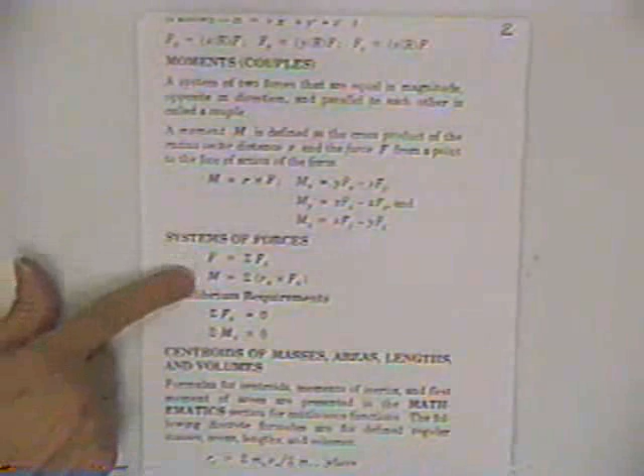There is a section called statics. It is only 2 pages long. There are many more problems that involve statics on the quiz than that, but this is the type of material we're going to cover. You'll notice I give you information on forces, resultant of forces, resolving forces from their components or taking components of the force, moments or couples, sets of forces or systems of forces. Once we get forces behind us, including forces and moments, we'll be doing centroids of various items.

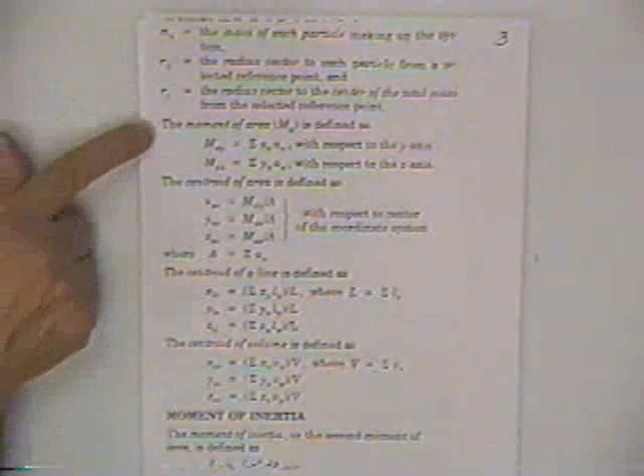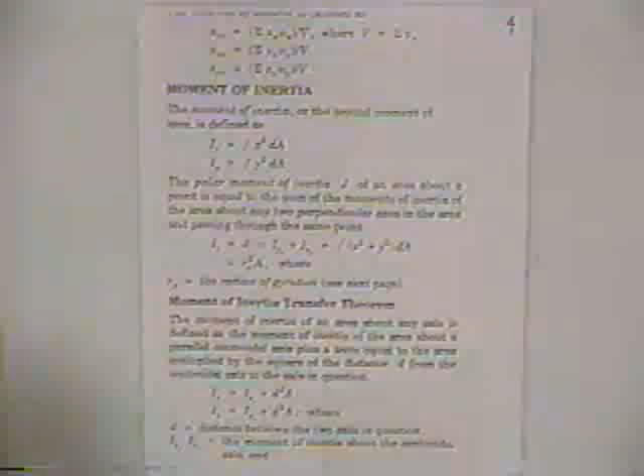There's about another half a page of information or derivations or controlling equations for how to find centroids. Information on moments of inertia. You see some of this duplicated because when I blew it up it got a little larger. And moment of inertia transfer theorem. Again, part of your moment of inertia equation.

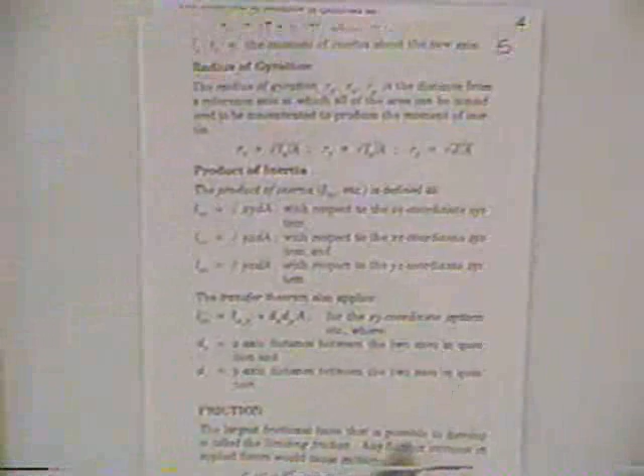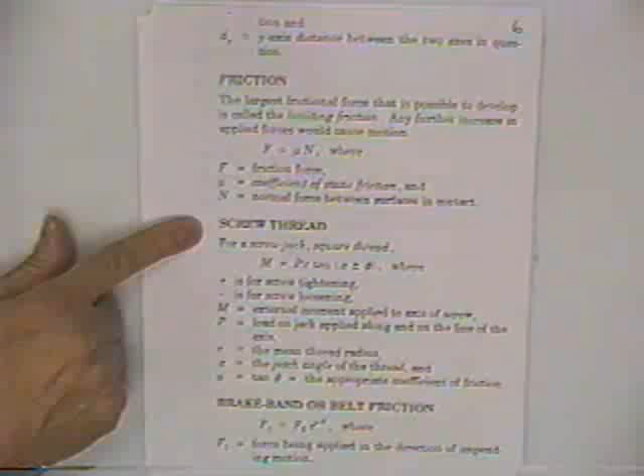They hint that they may indeed ask you information on how to find a radius of gyration used in column buckling work, how to find a product moment of inertia, back in some more traditional statics, friction. They got some things a little arcane, I would think, but if it's in this book, someone convinced these people that that was an important enough item to put in there, so we will cover it.

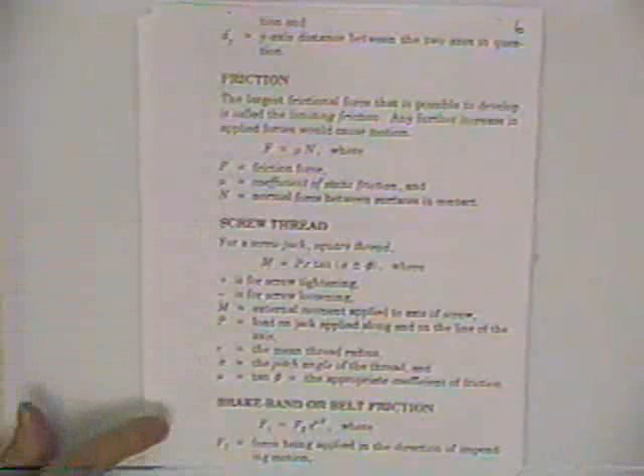Square thread screw jacks, brake band or belt friction, statically determinate trusses, plane trusses by method of joints and by method of sections, and then concurrent forces in 2 and 3 dimensions.

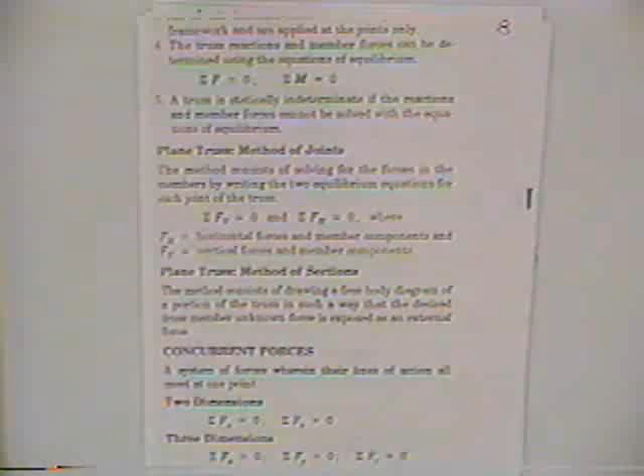Now, one of the interesting things you find in here that really seems to be left out is frames, and I believe the reason they left frames out of this information is because it is nothing but statics. They've already pretty well asked you to be able to put pieces of bars and stuff like that in equilibrium, and so I can pretty well assure you there's very likely to be a frame problem on there, so we'll cover frames also.

We'll start from the beginning for anybody who's really forgotten all this stuff. If you already pretty well know this, you could, if you've got a tape on your own, you could advance it forward. First, let's take some forces, typical forces.

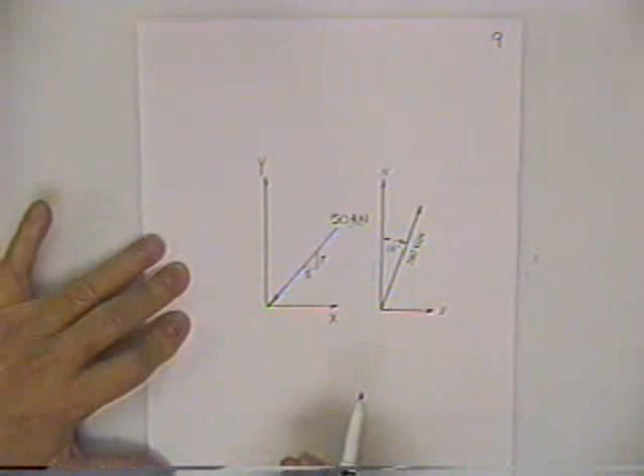The exam is going almost entirely now to metric units, so you'll probably see most of the problems in meters and newtons and that type of units. You should go ahead and get familiar with them. If you're unfamiliar with them, they're confusing for a while, but the more you work with them, they just become another way to buy some Rice Krispies by the newton instead of by the pound, so it probably won't matter much.

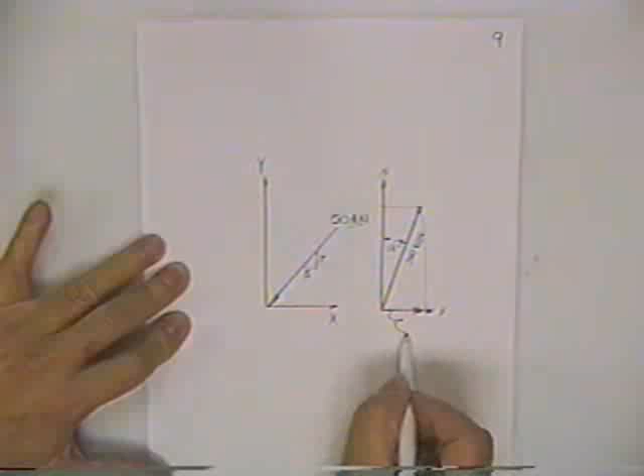There's two ways they would give you a force. Many times you will need to determine the component of these forces on a set of axes. They could give you the force and give you some angle, perhaps with respect to the vertical axis, perhaps with respect to the horizontal axis. You can draw a box around this force. The projection on the x-axis could be found by simply multiplying the original force, 260,000 pounds, and then you multiply that times the cosine of the included angle between the force and the axis that you have been asked to find that component. So since we've got 90 degrees in a right angle, we're talking about 72 degrees.

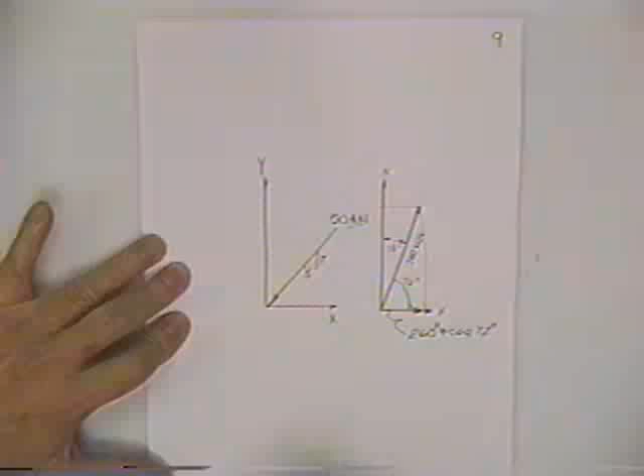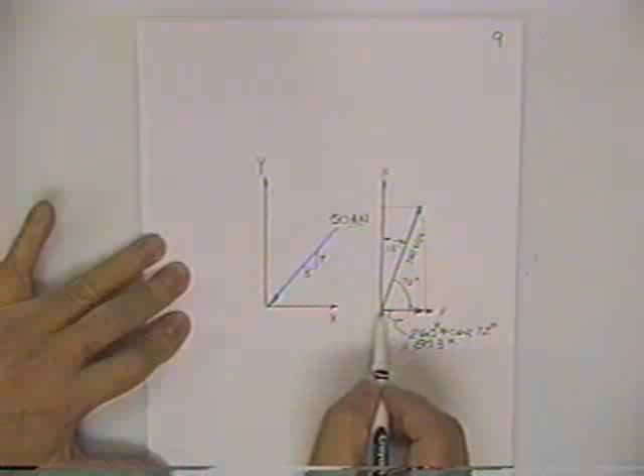260 kips times the cosine of 72 degrees gives 80.3. You should be able to tell if this is reasonably accurate, because if this line is about 260 inches long, then this side of the triangle is about 80 inches long. So 260 kips, about 80 kips, is probably correct.

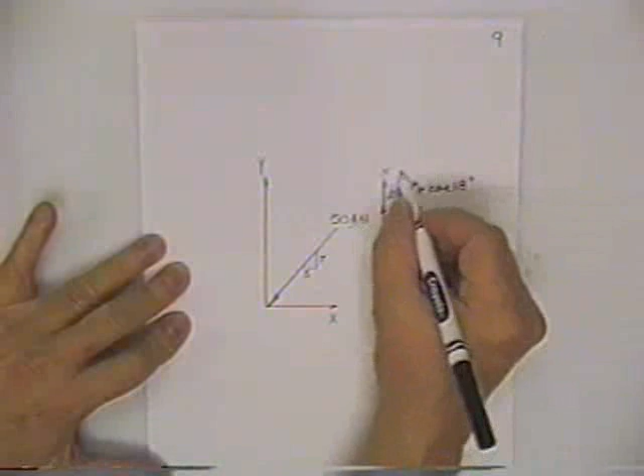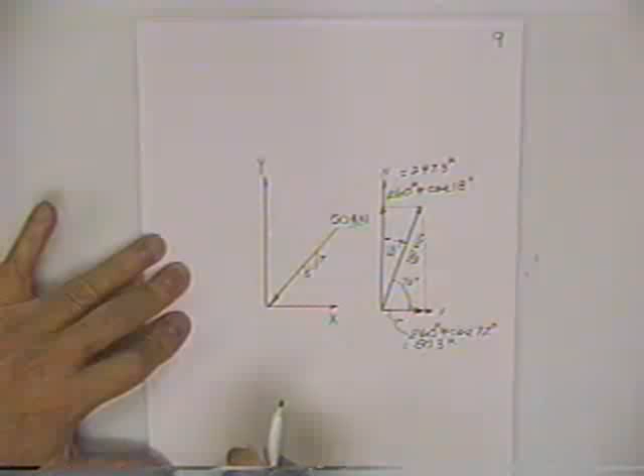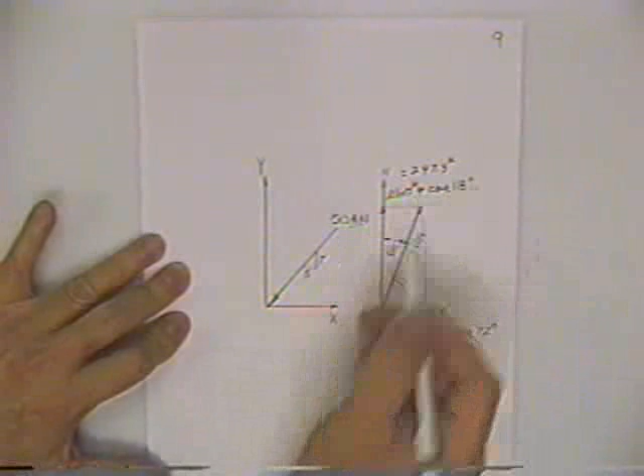To find the vertical component of the force, you multiply the force by the cosine of the angle between the force and the axis upon which you want the projection. That's 260 kips times the cosine of 18 degrees, for a total of 247.3. Now, a lot of times the answers on your quiz won't be that close. They may just say 250 kips, but they want the closest number. You probably don't need 4 decimals of accuracy.

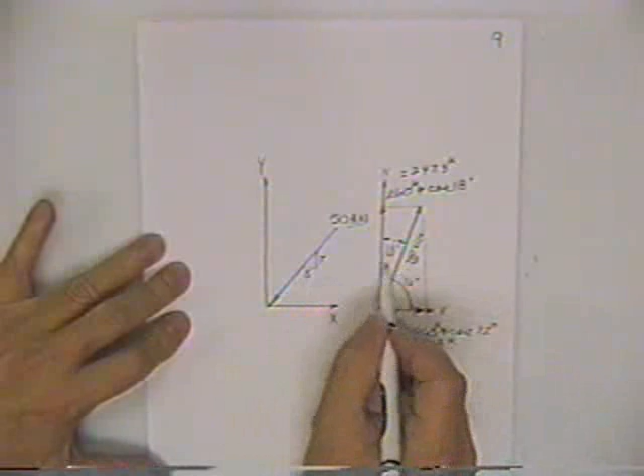Another way of asking for components of forces is when you know the slope of the force, as opposed to the angle at which the force sits. Again, I draw a box around the force, and without any help from a calculator, if this side is 50, then that number looks like about 30. You should have some feel for what the number is. If that's 50 and that's 30, this one is maybe somewhere around 40.

One nice thing is if you look at the quiz and the possible answers are A, B, C, D, E -- say 32, 47, 99, 106, and 10 -- well, I don't have to do any work, I don't even need my calculator. It's got to be that one.

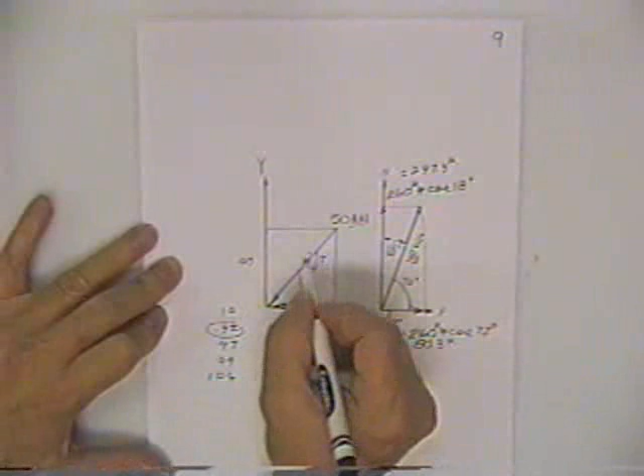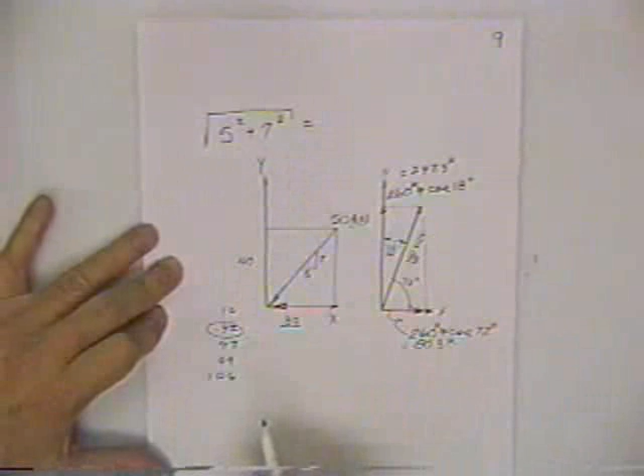But to get it accurately, you need to know the length of the hypotenuse for this short piece. You take 5 squared plus 7 squared, the sum of the squares of the two sides, then take the square root. That gives you 8.6, or more accurately, 8.602.

You could then find the angle here by saying, give me the angle whose cosine is 5 over 8.6. But if you do that, when you find the cosine of this angle, it's just going to turn right around and be these two numbers. So you might as well just say how much this force points in the horizontal direction.

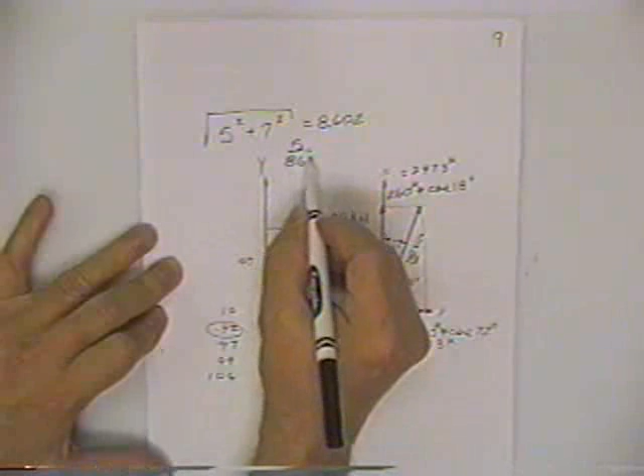That's 5 over 8.602 multiplied times the original 50 kilonewton force. So the horizontal component is about 5/8 of the original force, and that comes out to 29.06 kilonewtons.

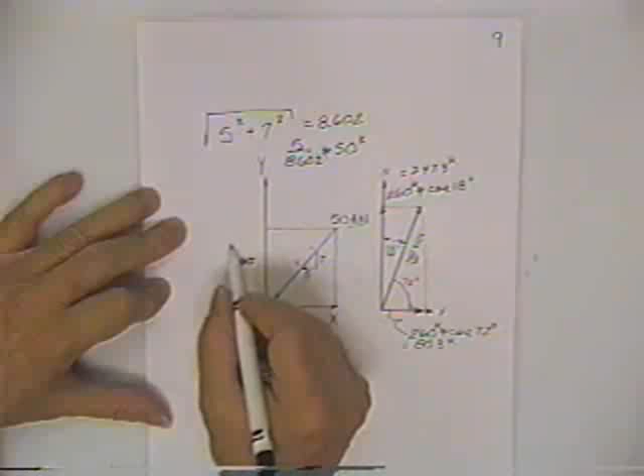Pretty close. Then the vertical component can be found using the vertical side of this triangle, which is 7. That means the vertical projection of that force is 7 over 8.602 multiplied times the original magnitude of the force. 7/8.602 times 50 kilonewtons is 40.69 -- that's guessing much more accuracy than you have any hope of getting. So that's just luck that those came out that close.

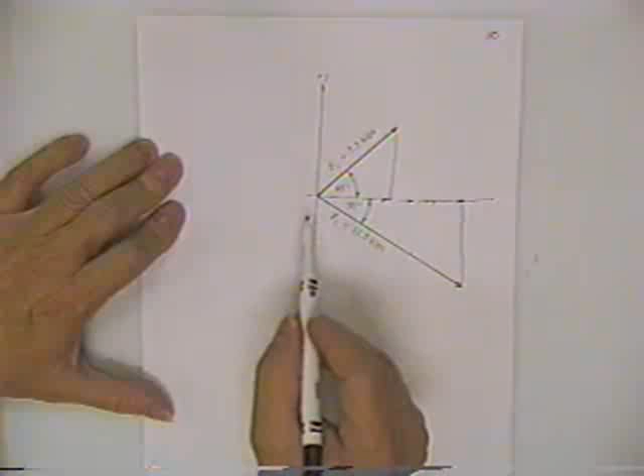Now, sometimes you'll be given a pair of forces and you will resolve them into one single force. We do the same thing: we get the horizontal projection of the 7.5 kip force, then find the horizontal projection of the 11.5 kip force, and add them together for the single force that would act in the horizontal direction and replace these two.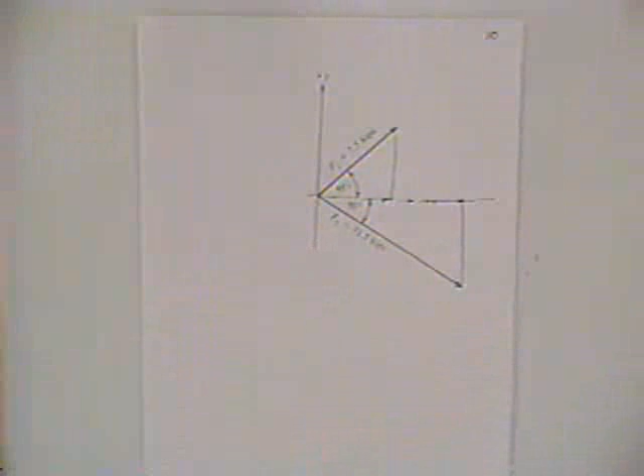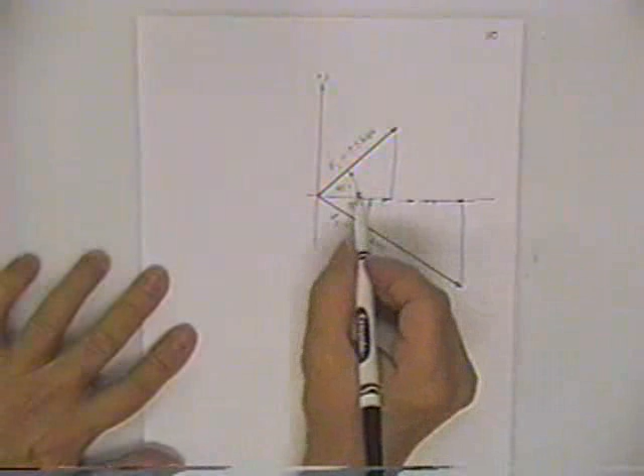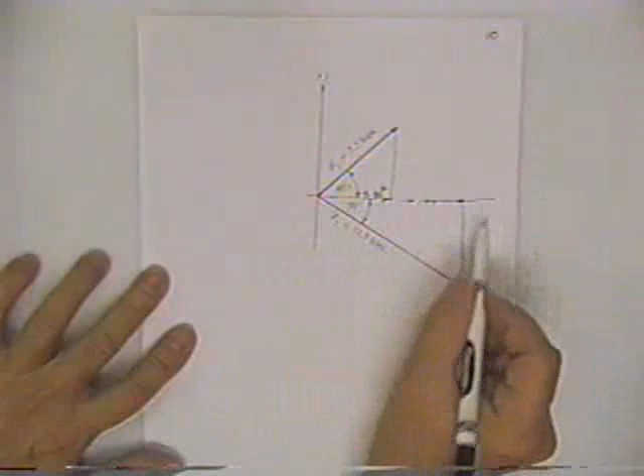Now then, we take the horizontal component of the F1 force: 7.5 kips times the cosine of 45 degrees, giving a projection of 5.30 kips on this axis. We take the horizontal projection of the 11.5 kip force: 11.5 times the cosine of 30, giving 9.96 kips. We add both together: 9.96 plus 5.30 gives a total of 15.26 kips.

Then we do the same thing for the vertical components. Draw a box and get the vertical component -- they look about the same, assuming they were drawn to scale. If you multiply 7.5 times the cosine of 45 degrees, you get 5.30. If you multiply 11.5 times the cosine of 60 degrees (this being 30 degrees here), you get 5.75 kips. So 5.30 kips pointing up, 5.75 kips acting down -- the total down is the difference of the two, 0.45.

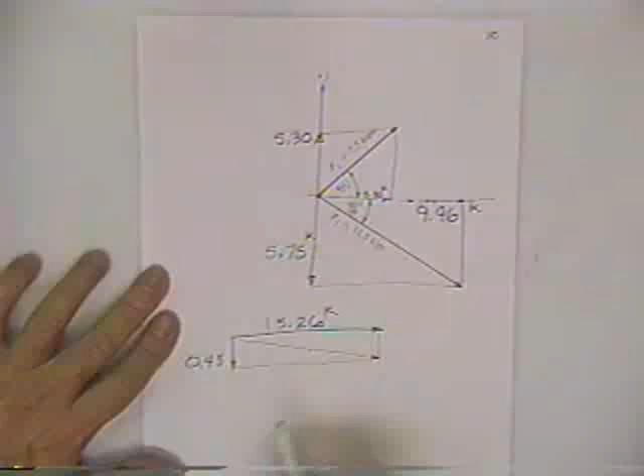There is some force I could draw which would have this much horizontal component, 15.26, and this much vertical component, 0.45. I could easily get that by drawing that same little box around this unknown force. That force is probably given the name something like R.

You could find R by squaring the two sides: 15.26 squared plus 0.45 squared, then take the square root of the sum. The magnitude of this force would be 15.27 kips.

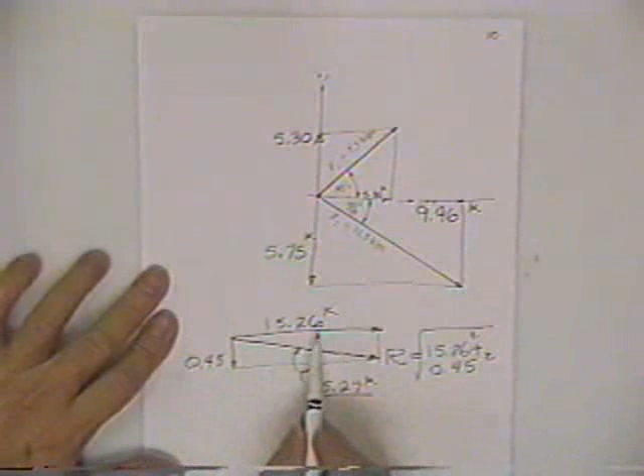Now you can also find the angle at which this force sits. This is the resultant of the original two forces we had, a 7.5 kip force and an 11.5 kip force. You could replace those with their resultant, 15.27 kips in magnitude. The resultant force has to push down and to the right because the components of the original two forces summed down and to the right.

You can find this angle, theta, by using the tangent of that angle, which is opposite divided by adjacent. So the tangent of theta would be 0.45 divided by 15.26, and if you hit arctan on your calculator, you find that angle to be 1.69 degrees.

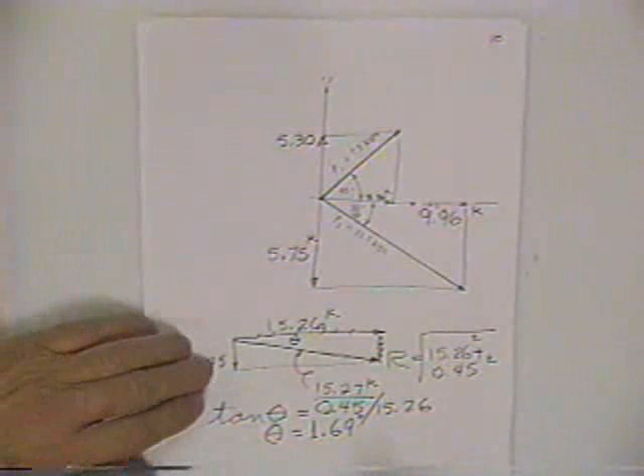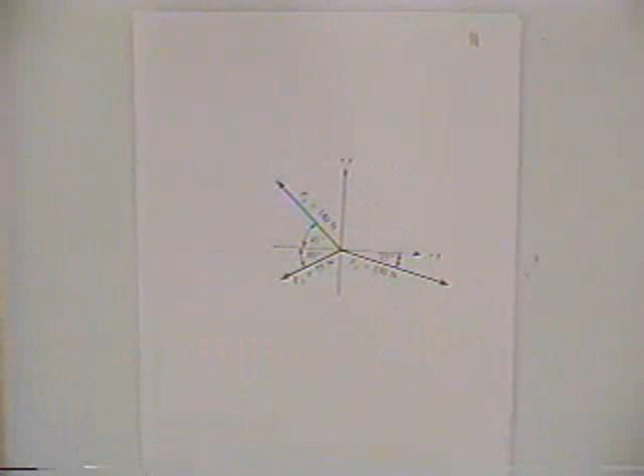Here would be a third example, on page 11. In this case, we have a 140 Newton force at 45 degrees, a 75 Newton force at 30 degrees, and a 130 Newton force at 15 degrees.

We would do the same thing as before. We'd box in each of these forces in order to see what their components look like, about how big their components project on each of the axes.

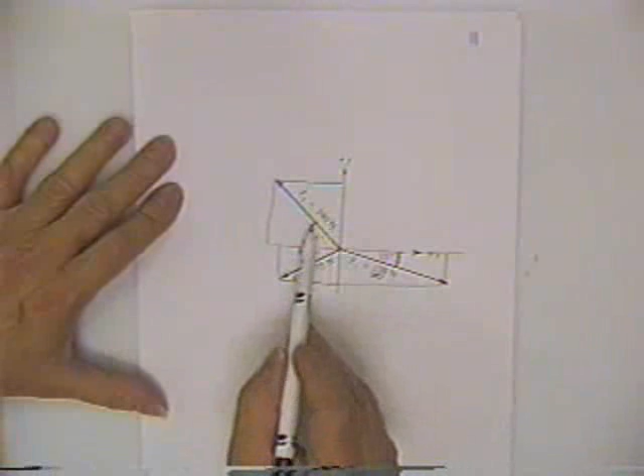To find this horizontal force, you would multiply the force times the cosine of 15 degrees. To find its vertical, you'd multiply 130 newtons times the cosine of 75 degrees, the complement of this 90-degree angle. Then you would have the 75 Newton force times cosine 30 and cosine 60. Then you'd have the 140 Newton force times cosine of 45 and cosine of 45.

I don't care if we work out those numbers as long as you know what we're doing here.

You'll be able to add this horizontal force, subtract this horizontal component, subtract this horizontal component, and the resulting sum of those three numbers would be the total horizontal projection of one single resultant for these three forces.

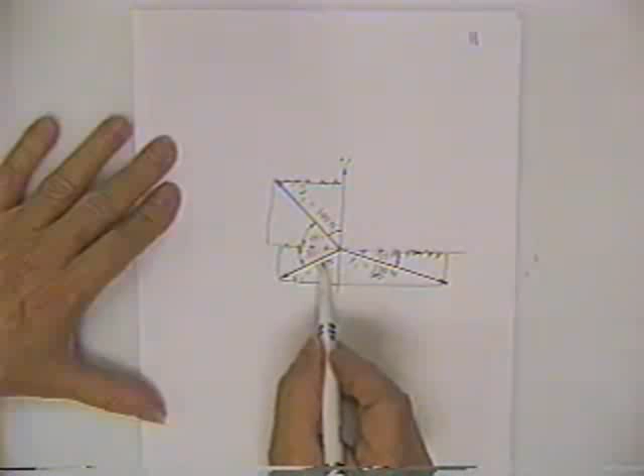Then you do the same thing for the vertical components. You'd multiply F3 times the cosine of 45 degrees. You'd multiply F2, the 75 Newton force, times the cosine of 60 degrees, this one being 30. And you'd multiply this 130 Newton force times the cosine of 75. That would give you the vertical components.

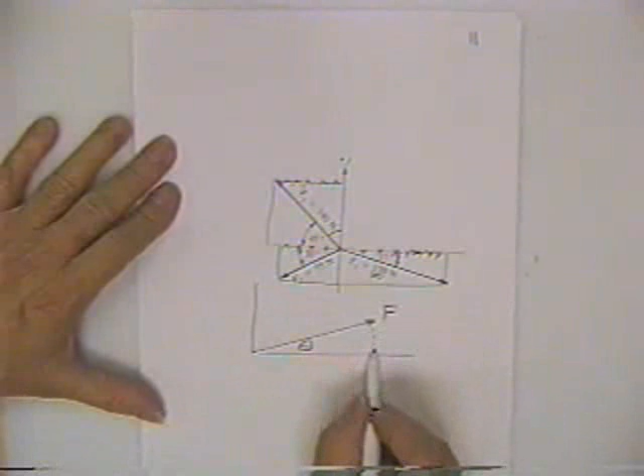So anytime you want the component of any force on any axis, all you do is multiply the magnitude of that force times the cosine of the included angle.

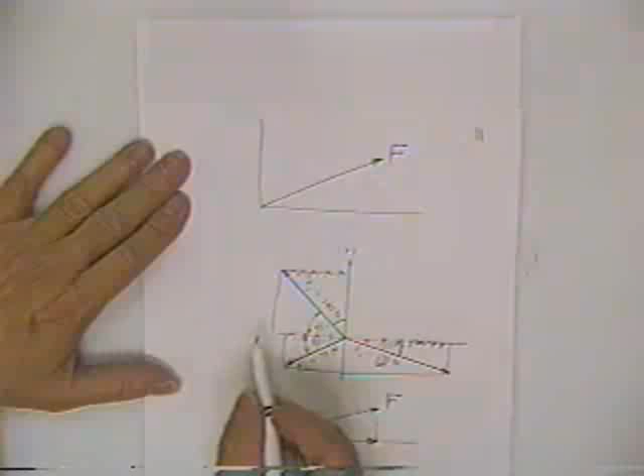Anytime you want the components of a force given in terms of slope instead of angle in degrees, for example, you might have a force that is 200 newtons, with a rise of 5 and a run of 11. In other words, the slope of that angle is rise 5, run 11.

Then I would take 5 squared plus 11 squared and take a square root to find out how long this piece right here is: 12.08.

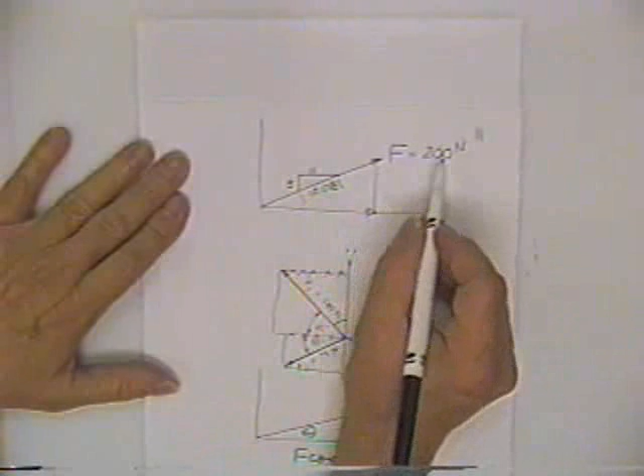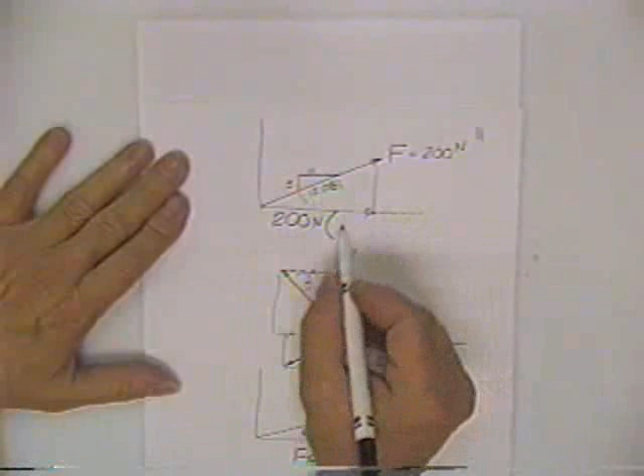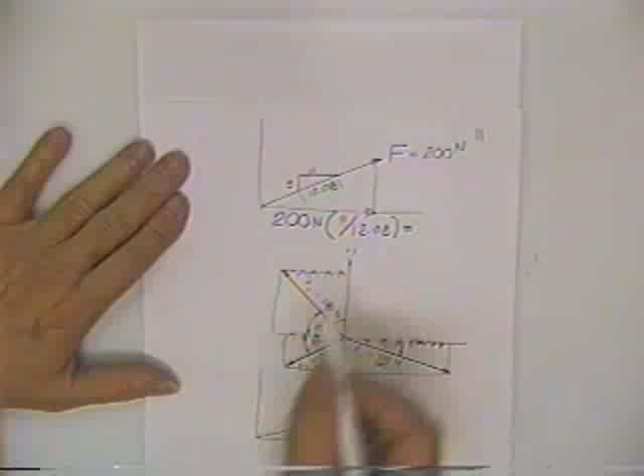The horizontal component of this 200 Newton force is the original force, 200 newtons, multiplied by the horizontal side of the angle, that's 11, divided by the hypotenuse, 12.08, which gives the horizontal component equal to 182.1 newtons, which looks about right. If that one looks 200 long, that looks about 182.

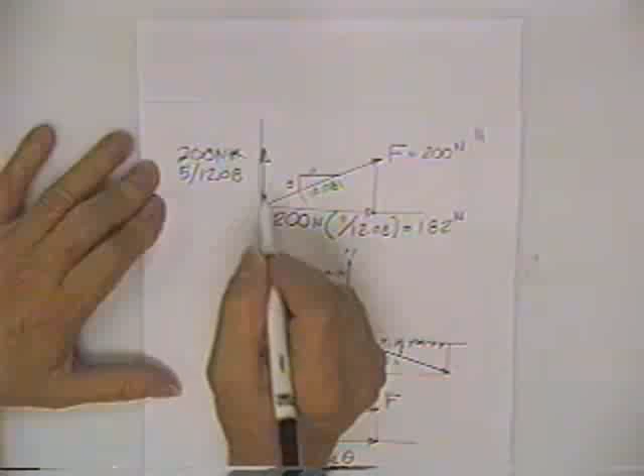By the same token, this number should be 200 multiplied times 5 over 12.08, because 5 is the vertical side of the triangle, and you're looking for the vertical side of the components, which is equal to 82.8.

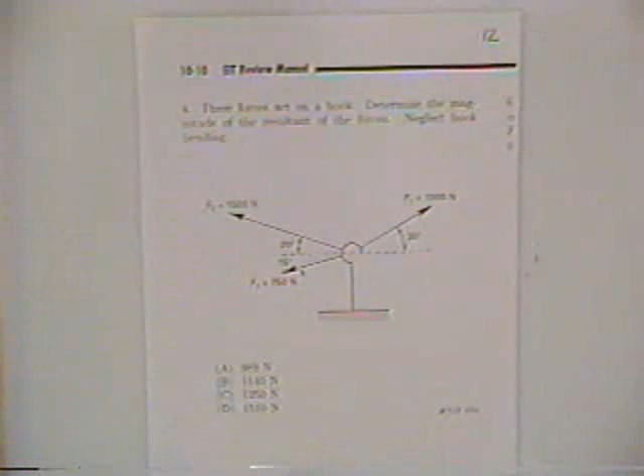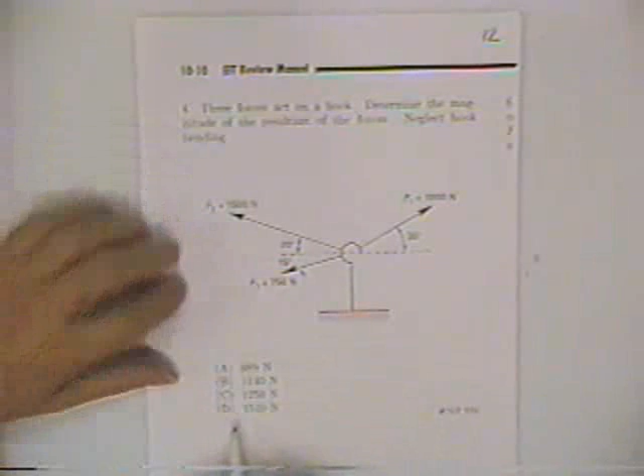A typical problem on the exam, this one came out of the review manual, section 10-10 in the manual we sent you, would be 3 forces given the angles at which those forces sit. Your choice is which one of these is the appropriate resultant of this set of forces acting on this steel hook.

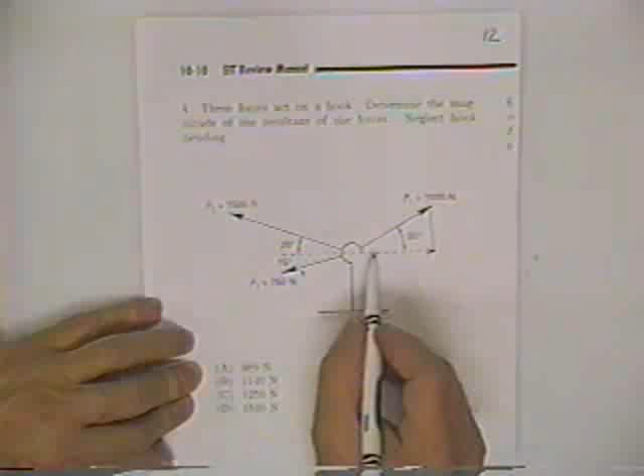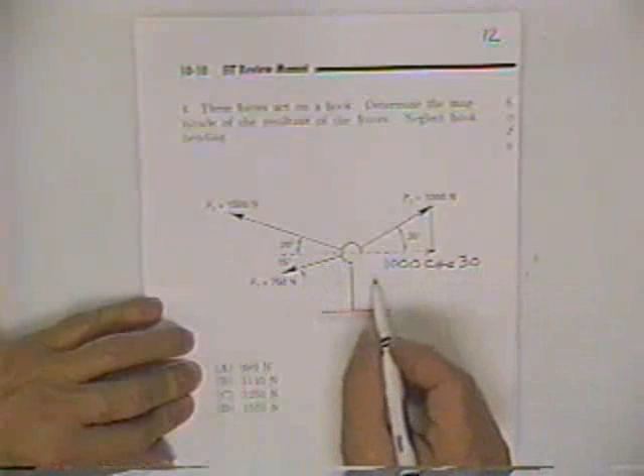To get that, you'd multiply 1,000 times the cosine of 30. From that you would subtract, because it's going to the left, 750 times the cosine of 15. From that you would subtract 1,500 times the cosine of 20, and you'd sum all those 3 horizontal components, which would give you the horizontal component of the answer.

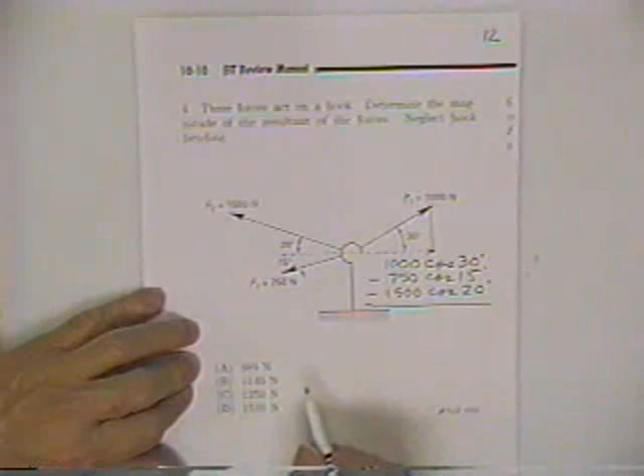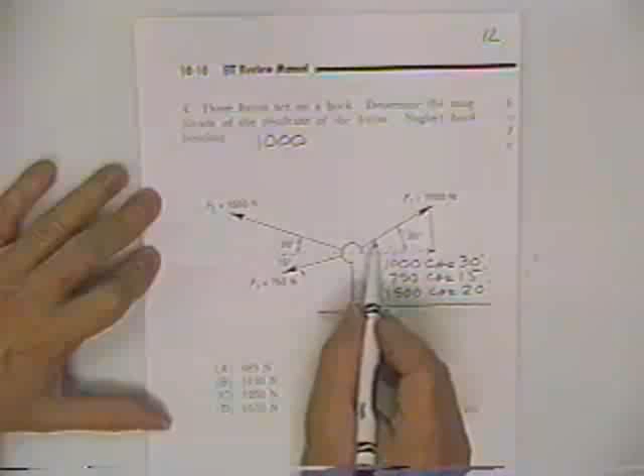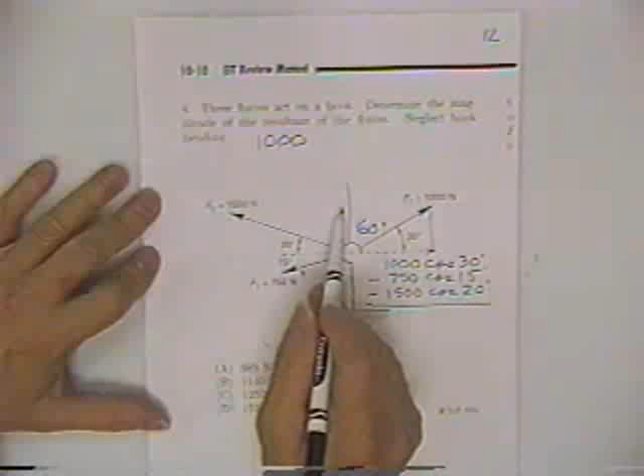To get the vertical component, you'd multiply 1,000 times the cosine of 60 degrees. You can use the sine of 30 if you want—that's obviously the same thing. If you're a little rusty on this, I would just always take the force and multiply it times the cosine of the included angle. That way you'll never have to remember if you're supposed to use sine or cosine. So that's 1,000 times the cosine of 60 degrees.

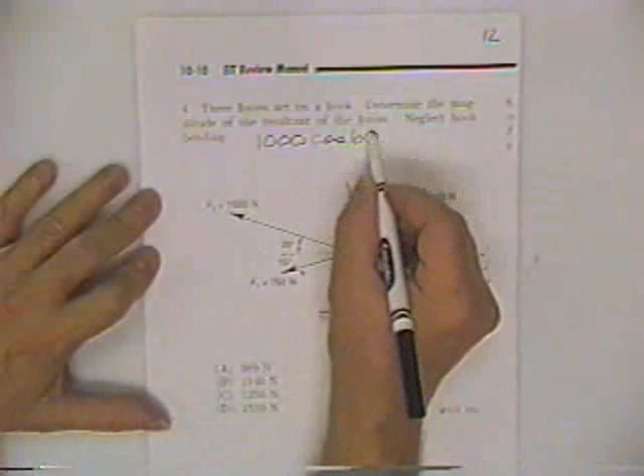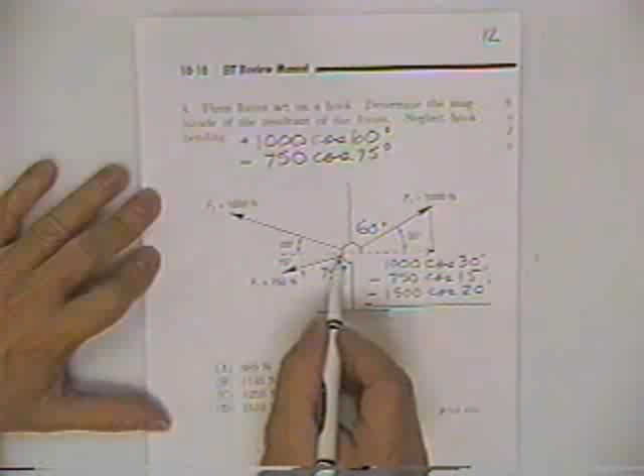I would call that a plus number because the force is pushing up. From that, I would subtract 750 times the cosine of 75 degrees. To that, and I would call that a minus because this component, or this force, is pointing down and to the left. This guy's pointing up and to the right. This guy's pointing up and to the left.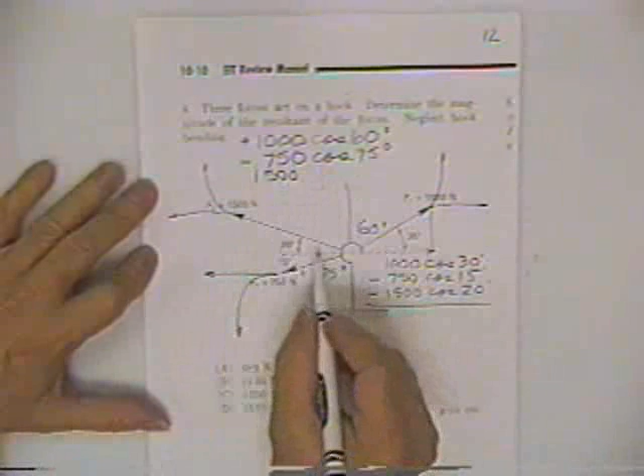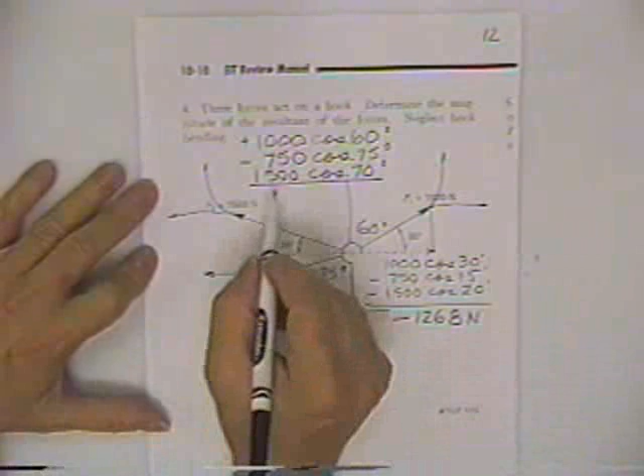So then the last number is a 1,500 Newton force multiplied times the cosine of 70 degrees. Got the sum of those yet? Yes, sir. What does that come out? Minus 1,268. Alright, add those up, 1,268 newtons, and the plus minus plus

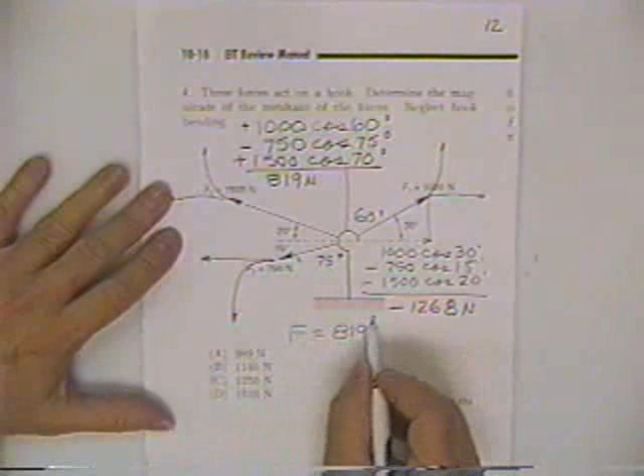819 newtons, and therefore we should be able to find the one force that would resolve all these forces into a single force, and that number would be 819 squared plus minus 1268. That's not going to matter because it's going to square. Take a square root and you get 1509, and therefore there's your answer.

So about 2 minutes after you start, you got an answer, and that's usually what they're looking for, about 2 minutes per problem.

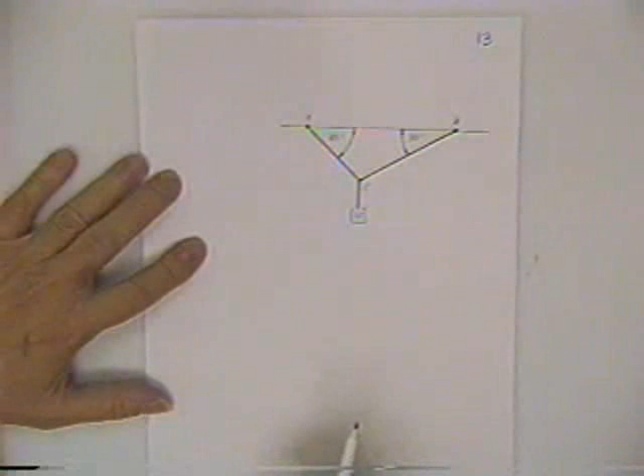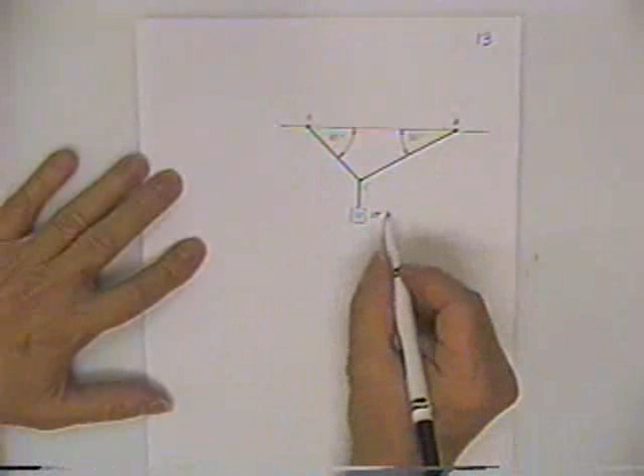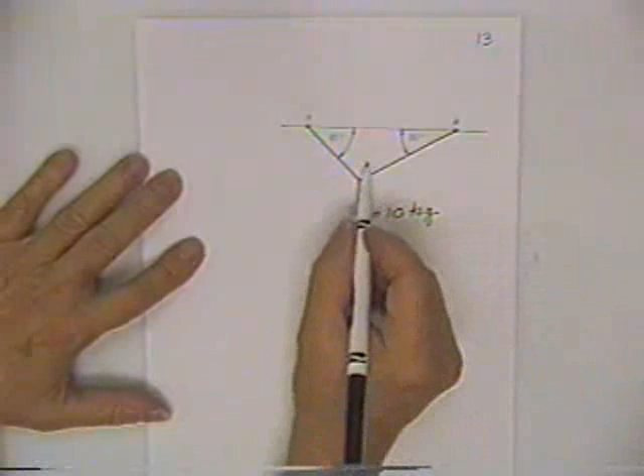Alright, another typical example is trying to find forces that would keep something in equilibrium. In this case, I have a cable tied at points A and B to support a mass, and we could say that mass is equal to 10 kilograms. And then I could ask you how much force is necessary to keep these forces in equilibrium, to keep the mass supported. To do that, you need a free body of the connection point.

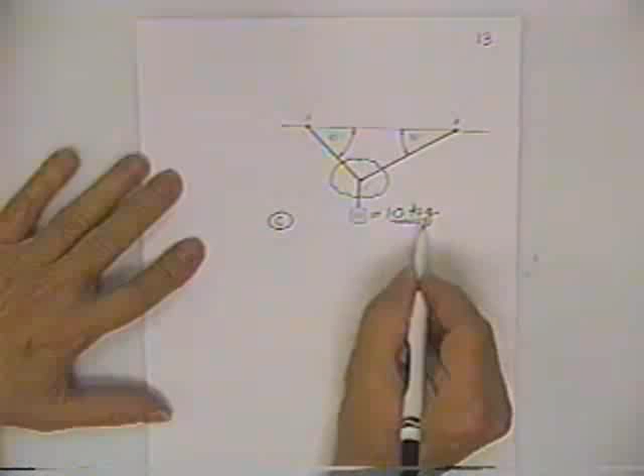So we would show the connection C. If you're asked what the forces are, you need to be careful—a lot of times they'll give you this in terms of kilograms instead of in terms of a force. And one of the answers probably will be without the 9.81 attached to this number to change this mass into a force.

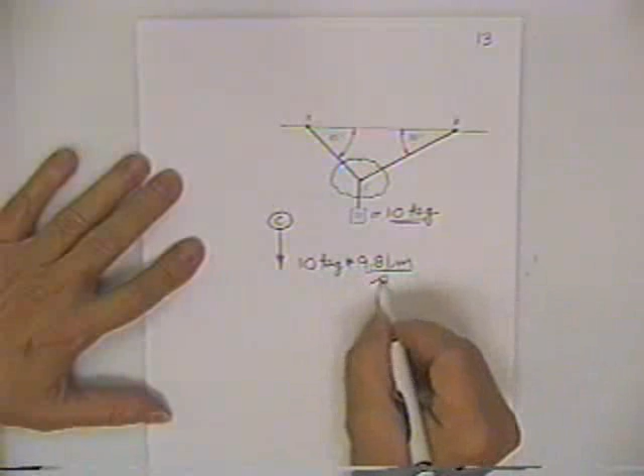So I'll show a force down, 10 kilograms multiplied times 9.81 meters per second per second. If you've forgotten why that is, it's almost impossible to forget F equals ma.

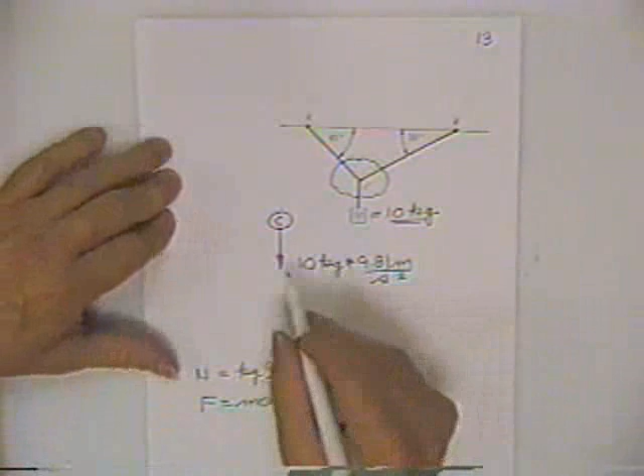Force equals mass times acceleration. If force equals mass times acceleration, then here's your force over here. It will be something like newtons. The mass will be kilograms, and you can tell you got a problem there because mass isn't going to equal a force. What do you have to multiply it to make it a force? You multiply it times g, and that's 9.81 meters per second per second. A kilogram meter per second squared is the same thing—they gave that assemblage of units the name newtons, and so that's why we got to multiply times 9.81 to turn it into a force.

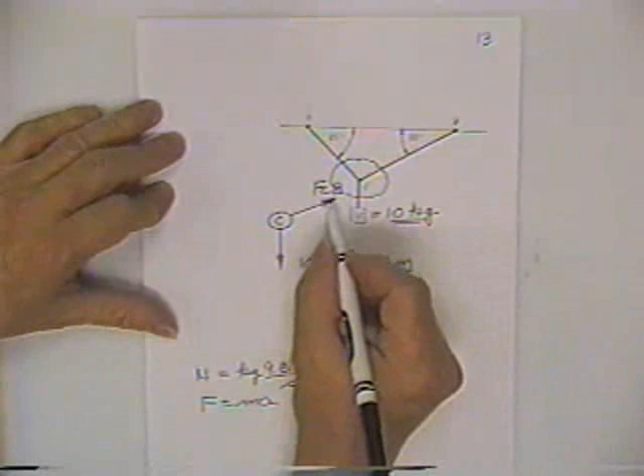Now, on this side, we have a force. It's absolutely critical that when you cut this wire and show a free body down here, you do two things. Number one, you must give this arrowhead a name. A good name for that one might be FCB—it's an acceptable name since it's cut through CB. And you'll notice that I gave the arrowhead a direction. It's probably pretty obvious that the force is a pulling force, a tensile force, since it's a cable and since the weight is pulling down on the cable.

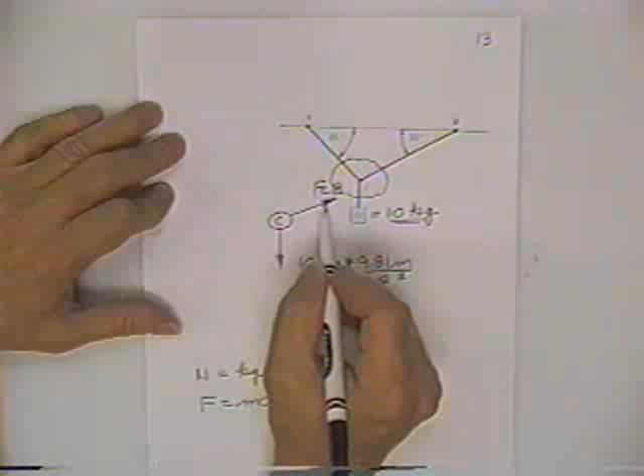But a lot of times in the structures you'll be asked to solve, you don't know the direction of this arrowhead. Many people say, well, since I don't know what the arrowhead's direction is, I'm just not going to put it on for now—I'll put it on later when I find out. You can't find out, it's absolutely impossible. The only thing you can do is to guess it goes some way. And when you solve for the answer, if it comes out with a minus sign in front of it, that means you guessed that arrowhead on the wrong end. But without putting it on there first, you cannot solve for which way this arrowhead pulls or pushes.

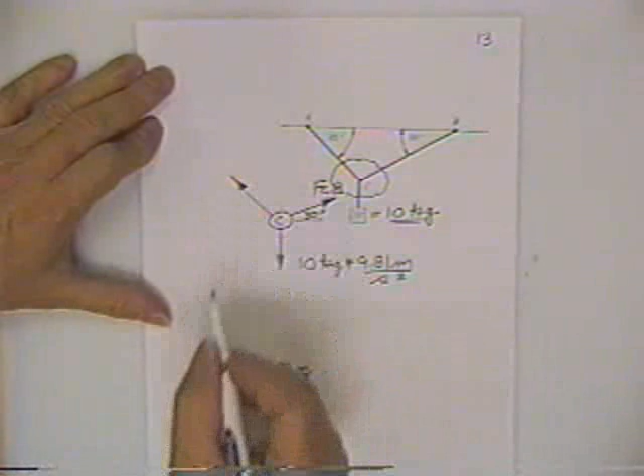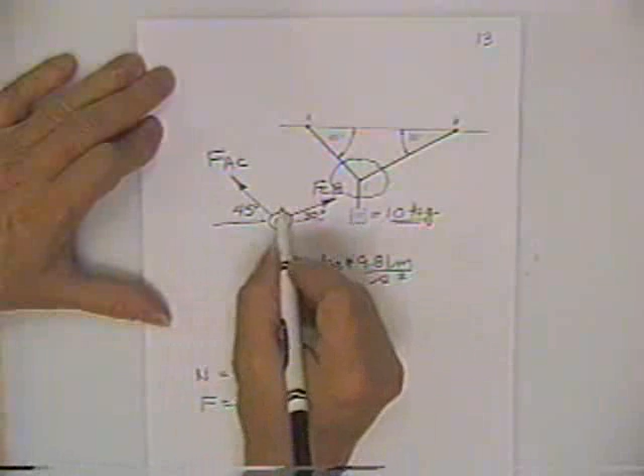Alright, so we have 30 degrees in here. We have a second force that's been cut. I'm going to put an arrowhead on it—that's a guess, it's a pretty good guess, it's probably even correct, but it is nothing but a guess for right now. And that would be the force in member AC. It sits at an angle of 45 degrees and 45 degrees, and of course this one in here then is 60 degrees.

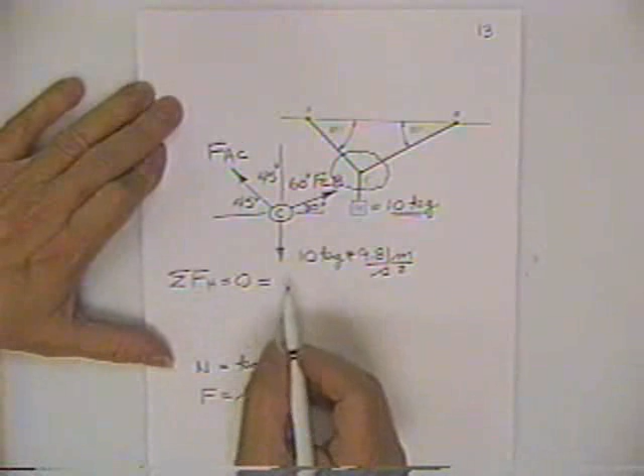Now, in order for this thing to remain stationary, you have a pair of equations that tell you that the sum of the forces in the horizontal direction must be 0, otherwise the thing will accelerate to the left and right. We can find out what the sum of everybody pushing in the right and left direction is, just like we did a minute ago, by finding the components of these forces. First, we take a look at this force—it has no horizontal component, therefore we don't enter him into this equation.